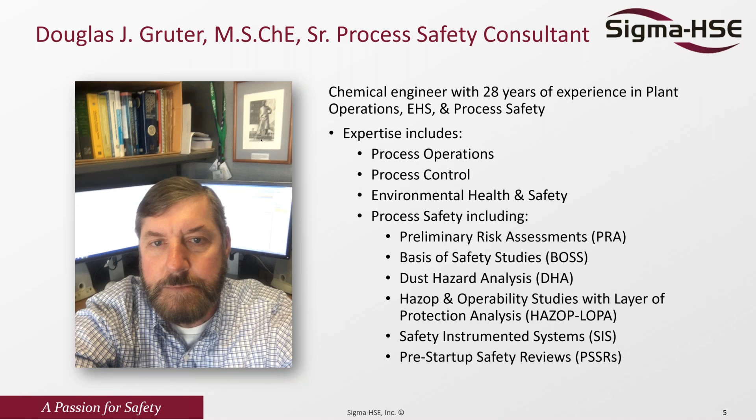What we're going to be talking about today are PHA revalidations. We're going to talk about why they're necessary and the timing of them, which OSHA does mandate. Different types of revalidations. The scope the revalidation should include, their contents, objectives, changes, incident investigations, and omissions and deficiencies. We're going to dive into these categories a little deeper during this presentation.

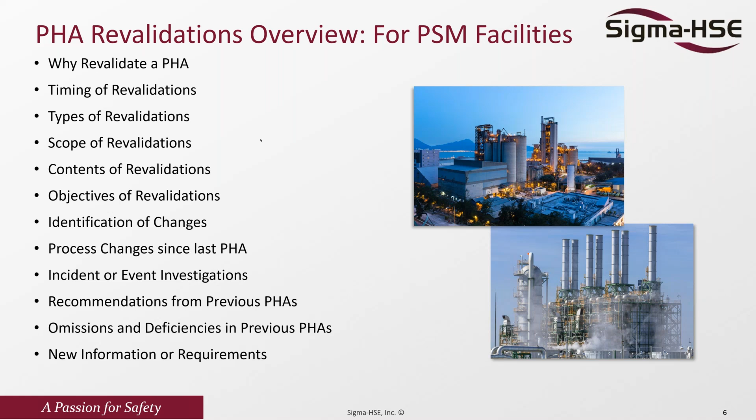Why do we do revalidations? Well, it's required by OSHA in the US, and they must occur every 5 years. Also in Europe, Seveso has a requirement where they're a little more vague, but periodically a review needs to be done and a safety report written.

How do we time revalidations? Well, the 5-year starting point can be from any of the following. It can be from the first PHA session to the revalidation, the last PHA session to the revalidation, when the report of the previous PHA was written, or when management accepted the previous PHA. The key here is once you pick a starting point, it must stay consistent throughout the life of the process.

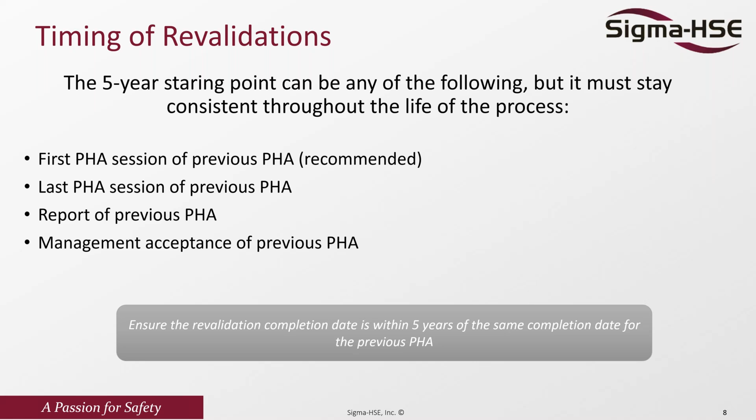There are a few different kinds of revalidations that we can do. One is called a simple update. And this is done when there are only minor changes to the process. Documentation requirements may have changed. The second type is a retrofit. And this would be when you had added or deleted a node, implemented a new risk ranking method, or you need to add or revisit human factors or facility siting.

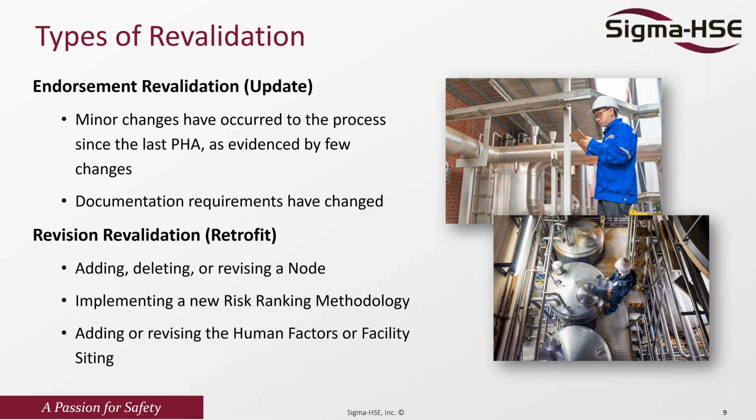The third type is more extensive and is called a redo. It's a replacement revalidation. This needs to be done when the previous PHA has significant errors or omissions, or the process has changed significantly since the last PHA, and that would be evidenced by a large number of changes or complex changes. The third time a revalidation replacement needs to be done is if the previous PHA documentation is lost and not available. And I've seen this happen also.

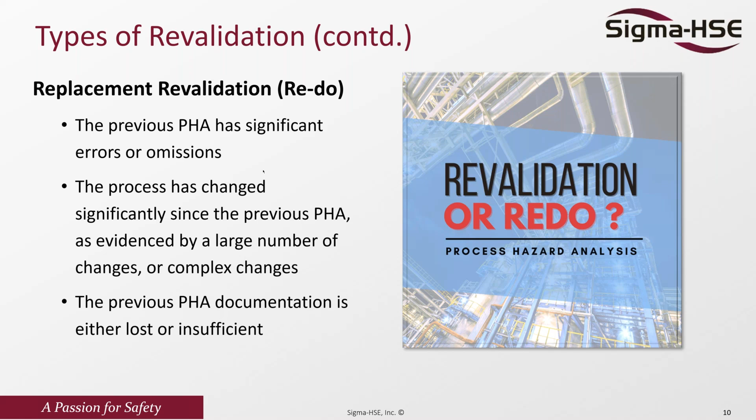So how do we know which of the three types of revalidations we should be using? Usually a company will have developed a checklist. The previous PHA should be audited against that checklist. And if the company's criteria is not met, a redo should be completed. Another situation that we see frequently today is when a company is acquired by another company, and the company that was acquired did not do their PHAs according to the new company's criteria.

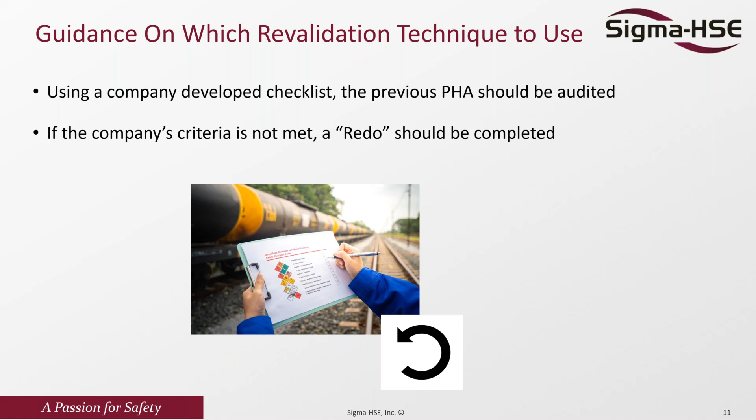So some guidance regarding the purpose, scope, and objectives. The revalidation PHA should not just be a rubber stamp of the previous PHA. The previous PHA will need to be reviewed, and a number of things need to be considered.

Additional purposes. Have the boundaries of the covered process changed? Have the utilities supplying heating or cooling or venting changed? Are all the multiple modes incorporated? Are there any new operating modes and additional hazards? And we'll go into a little different, more in-depth analysis of additional hazards later in the presentation.

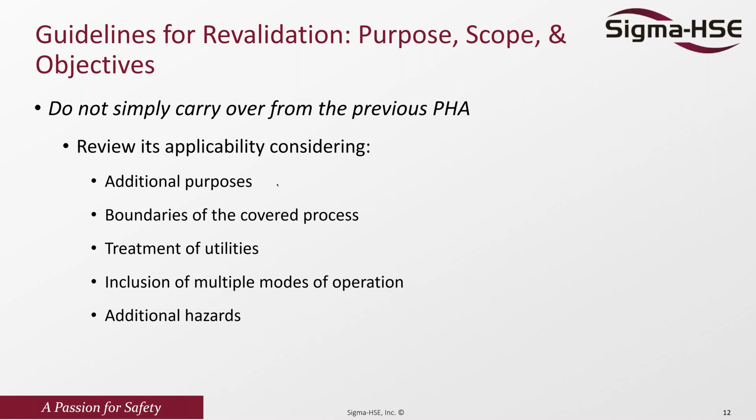When you're doing a revalidation, related studies will also need to be revalidated, such as facility siting, the human factors checklist. Did we build a new control room, which is more isolated from the process? Have the procedures changed? Or have the control system interlocks changed? Have we moved from a basic process control system interlock to a safety instrumented system interlock?

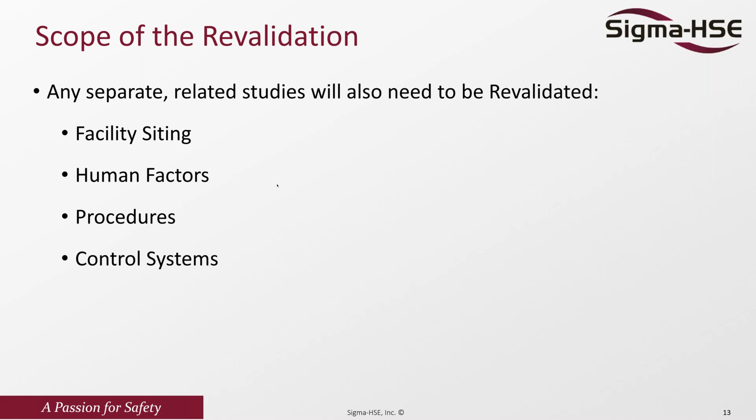The content of the revalidation plan needs to include any process changes, new requirements, omissions and deficiencies from the previous, any incidents, management of changes, new technology or information. A lot of times during the 5-year period, new technology will be developed and could be better for your process safety, and any number of regulations that may have changed.

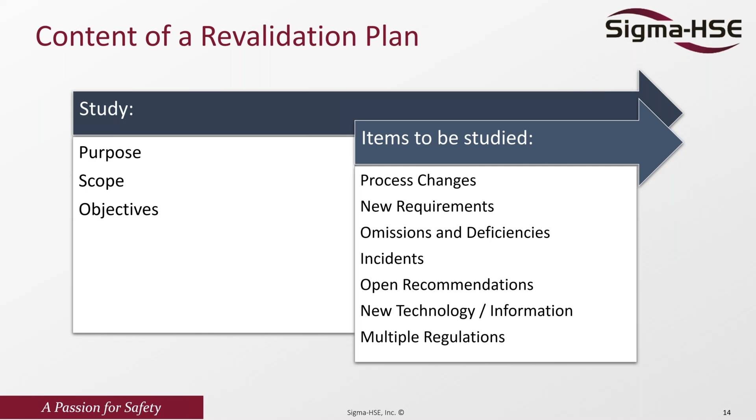The objectives are to produce an updated PHA that adequately addresses process hazards as they currently exist. Process changes may have introduced new hazards, or they may have added additional layers of protection, which reduces the likelihood of an event occurring.

Are there any changes in the off-site receptors? Have any parks, nursing homes, child care centers been built around the site? That needs to be considered also. Have there been changes in the environmental or process safety standards in that 5-year period?

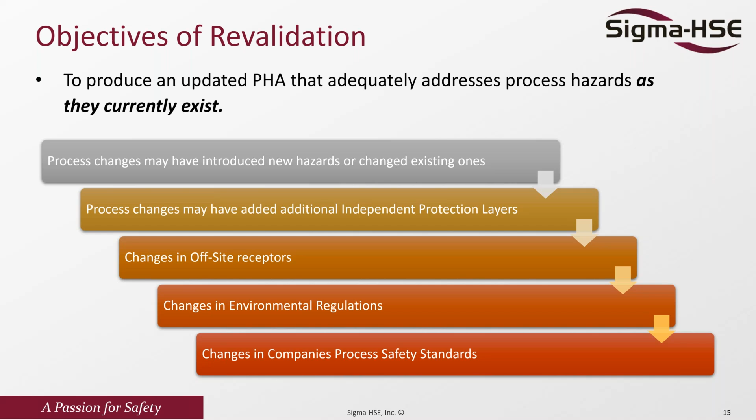So the objective of the revalidation is to review the same issues of the previous PHA, add any omissions from the previous PHA, review the consequences. You're also going to need to look at: are the recommendations made in the previous PHA complete? And do those recommendations reduce the risk to the company's acceptable risk levels? Another thing that's usually overlooked is, do the recommendations introduce any new hazards?

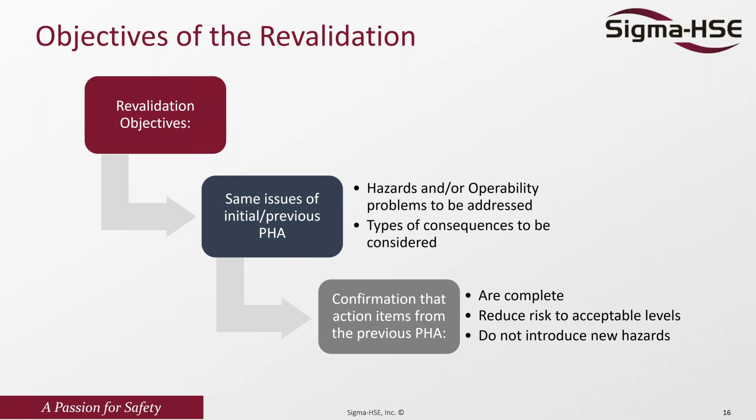So what changes are we talking about? Changes that are covered under the MoC process which require a pre-startup safety review. Does the PSSR have the required process safety information? Any changes which may have resulted from an incident or event investigation, were those recommendations updated and included?

Of course, any changes to the P&IDs and area classifications need to be reviewed. And these include actually walking out in the field and ensuring that the P&IDs are as built. A review of the standard operating procedures and maintenance procedures, and a review of engineering projects for new capital equipment. Have all those requirements been met?

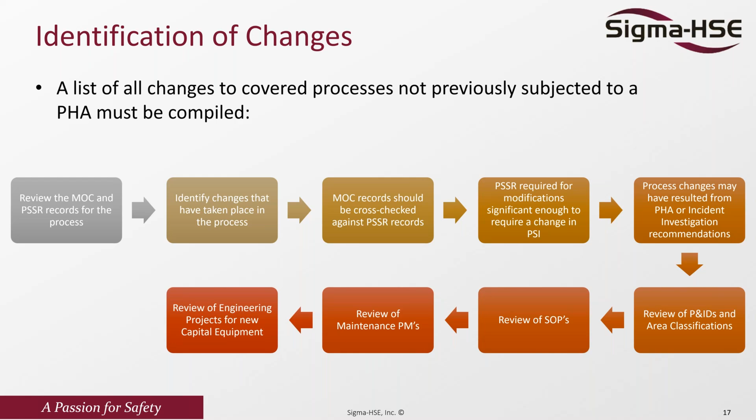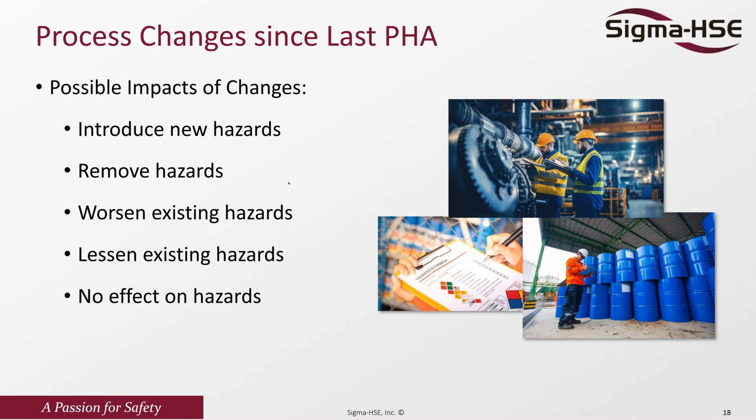Some possible impacts of changes could include new hazards, or they could have removed hazards. Do they make existing hazards worse or less? Or did the changes have no effect on the hazards? It's required that changes follow a management of change procedure. Those changes that did go through the management of change and pre-startup safety review program should be reviewed.

Sometimes changes get made on the fly and may not have gone through the management of change or the pre-startup safety review process. Those also need to be looked at. We don't generally include open or pending management of change. Those will be covered during the next revalidation or during that change's pre-startup safety review.

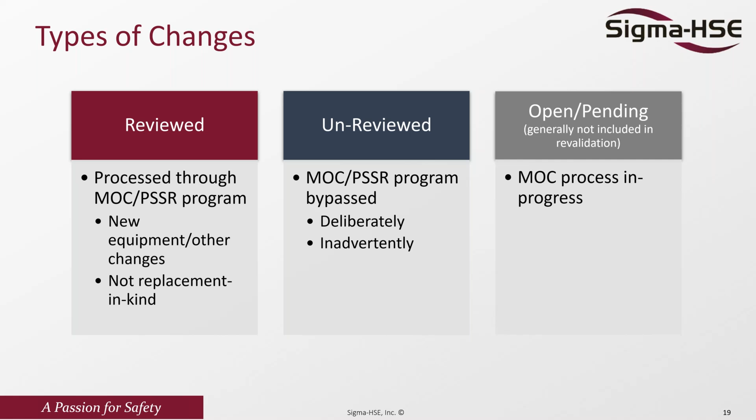We should also look at incidents or events. Incidents should be formulated into scenarios and the appropriate safeguards added. And we do that to ensure that the incident investigation actually did make recommendations which bring the scenario into an acceptable envelope based on the company's risk criteria.

Of course, in 5 years, you'll be working on recommendations from the previous PHA. Those recommendations should be reviewed, and if completed, moved from the recommendation to the safeguard column. The appropriate risk reduction credit should be given to each safeguard. That is their probability of failure on demand.

Next, we're going to talk about reviewing omissions and deficiencies from the previous PHA. These were items that were required at the time, but were missed. Could include incomplete consideration or documentation of the design intent, of deviations, facility siting, errors and omissions, previous incidents and near misses that were not included, scenarios that include failure of key safeguards,

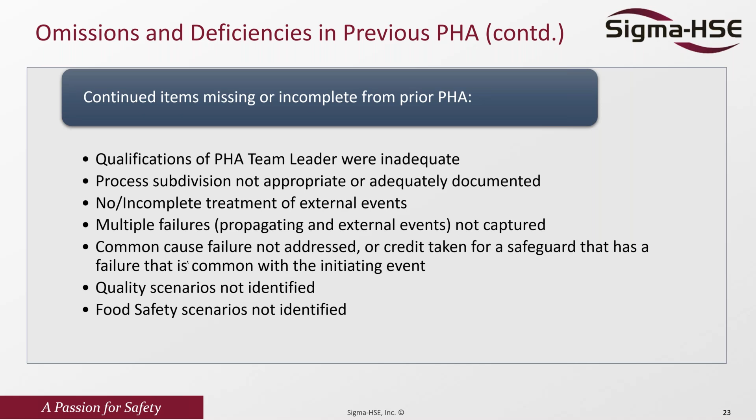Moving on to new information. New information that should be incorporated into the revalidation include any reactivity data that you may have gotten since the last PHA, any combustible dust testing, any lessons that have been learned. A lot of these come from the operating personnel in the facility.

The Center for Chemical Process Safety issues a process safety beacon on a monthly basis. And that gives things that have happened in the industry. And you want to make sure that if you have a similar situation, you cover those and put in layers of protection to prevent them or adequately mitigate them.

If your company has PSM training, that could alert the operators to something they may not have thought of, which may be brought up in the revalidation PHA. Same thing with environmental safety alerts that are issued by a number of companies.

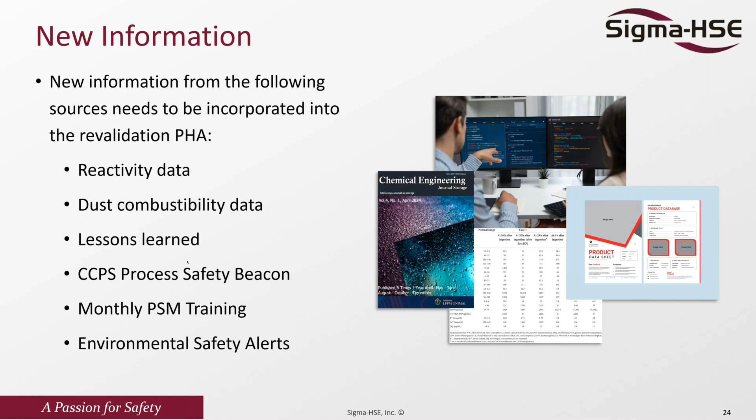We can also talk about the use of new or better technology. As I said previously, a lot of technology can be developed in that 5-year period. If it's new, it may serve the purpose of mitigating a hazardous scenario better than what you currently have in place. It may also improve layers of protection.

And one example would be switching an interlock from a basic process control system to a safety instrumented system interlock, which reduces the probability of failure on demand. And we do have a webinar recorded on that on our websites.

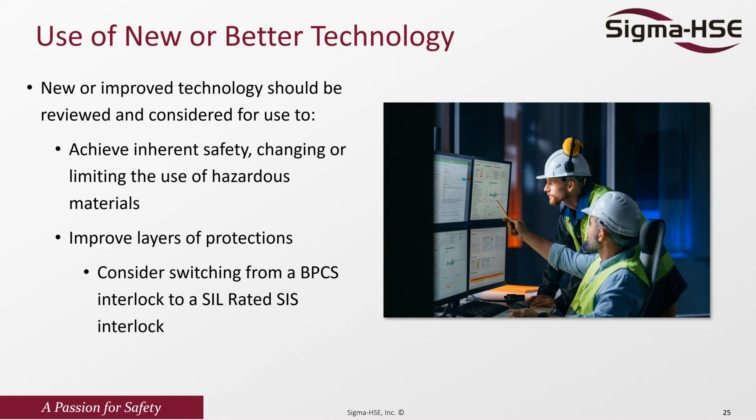We also want to identify new requirements. And those can be gotten from reviewing equipment or operational codes and standards, such as the one for safety instrumented systems, environmental or occupational standards and regulations, process safety codes and standards, and RAGAGEP, recognized and generally accepted good engineering practices.

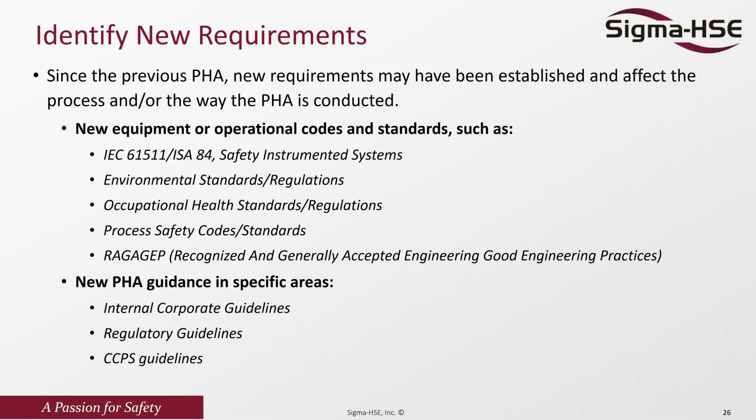You can also get some new requirements, maybe from an internal corporate guideline, and that may be the case especially if your facility was just purchased by a different company. Regulatory guidelines and the Center for Chemical Process Safety guidelines. These should be reviewed along with local, federal, OSHA and Seveso requirements and incorporated into your revalidation PHA.

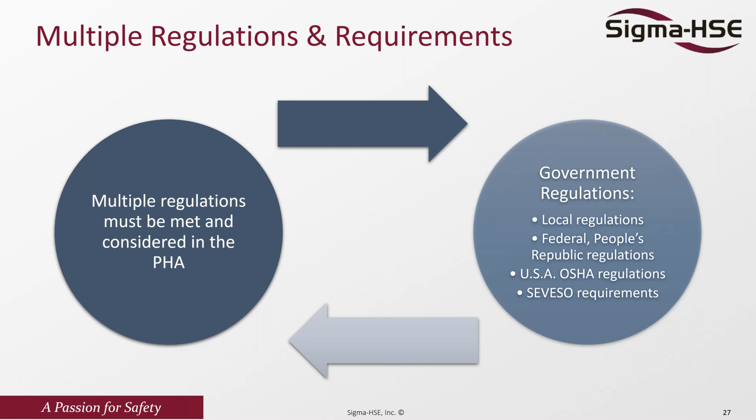In summary, all PHA revalidations must be considered based on the previous PHA scope, its depth and completeness. Typically, this is done with an internal company checklist to determine which type of revalidation is required.

Attention should be given to the extent of the changes and regulations, incident investigations, or event investigations, which may indicate that your previous safeguards were not effective, or the recommendations made during the investigations were not effective, usually subject to common cause failures, and that your management of change process may not have been correctly implemented. And that would include a pre-startup safety review after a management of change.